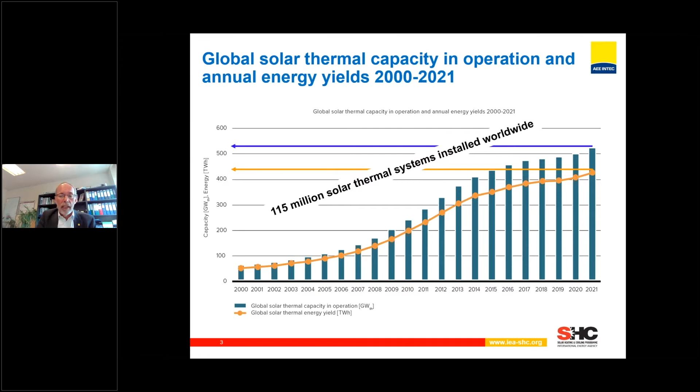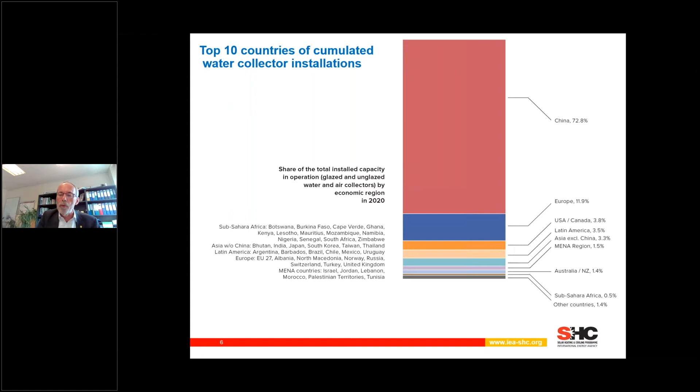Showing you the top 10 countries of the cumulated water collector installations, the total installations we have worldwide at the moment. You can see this did not change a lot or not significantly, whereas the major market is still China. It's really the dominating market worldwide, followed by Europe with about 12% of the total installed capacity. Then you have North America with US and Canada, Latin America, Asia excluding China, so mainly India, and they are in the range of 3 to 4% of global installations, then the MENA region with 1.5%, and Australia and New Zealand with 1.4%. So this just shows you there's really a dominating market by China in absolute terms.

This is also shown here in the top 10 countries of accumulated installations. China is clearly on top, with about 364 gigawatt installed capacity, followed by Turkey, United States, Germany, Brazil, India, Australia, Mexico, Greece, and Italy. What you can see here is what is installed in absolute terms.

The different colors give you an indicator of the different types of collectors installed. The yellow ones are unglazed collectors, mainly used for swimming pools, dominating in the United States and to a certain extent in Australia. The blue parts are evacuated tube collectors, and flat plate collectors are the green ones. So you have different markets in terms of collectors.

If you look at the same markets, the top 10, but per 1,000 inhabitants, this shows you more about market penetration. Barbados is leading with 600 kilowatts installed capacity per 1,000 inhabitants, almost 1 square meter per person, followed by Cyprus, Israel, Austria, Greece, and the Palestinian territories. China is number 7 worldwide in terms of installed capacity per inhabitant. So in terms of market penetration, other countries lead ahead of China. Of course, China, a huge country with a big population, leads in absolute terms.

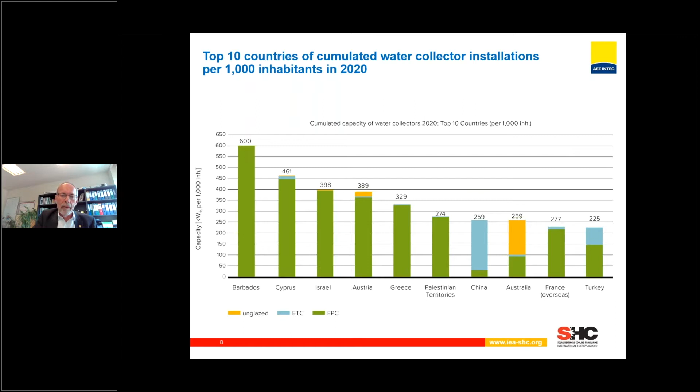What's also interesting, and this is changing gradually, on the worldwide scale the most used collector type is evacuated tube collectors, with 68-69% of the total installed capacity, or newly installed capacity in 2021. Worldwide, close to 25% are flat plate collectors. When I say world, as you saw in my previous slide, it's dominated by the Chinese market. It's really the Chinese market dominated by evacuated tube collectors.

If you look to Europe, it's a completely different, almost opposite picture: about 80% flat plate collectors and about 17% evacuated tube collectors, then air collectors and unglazed water collectors. What's interesting is that over the years we see a trend where, on the European side, flat plate collectors are slowly but constantly losing market share in terms of percentage, while evacuated tubes are growing slowly but steadily. On the other hand, worldwide, or on the Chinese scale, evacuated tube collectors lose a little market share while flat plate collectors are coming up more. This is an interesting trend we've observed for more than 10 years.

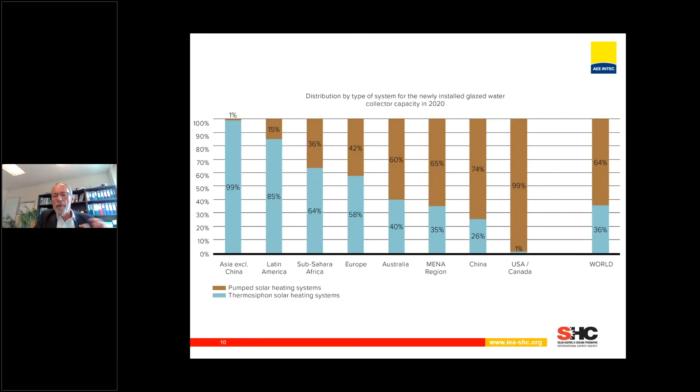Another important thing is that depending where you come from, you have a different picture of solar thermal systems. Worldwide, only 36% of total installed new installations are thermosiphon systems, the rest are pumped systems. But if you go to Asia, excluding China, so mainly India and other countries, basically the whole market is thermosiphon systems. You also have a majority of thermosiphon systems in Latin America with 85%, and 64% in Sub-Saharan Africa. But even in Europe—not just the EU, we also count Turkey, for instance—it's about 58% thermosiphon systems and 42% pumped systems. This just gives you an idea of how different these markets really are.

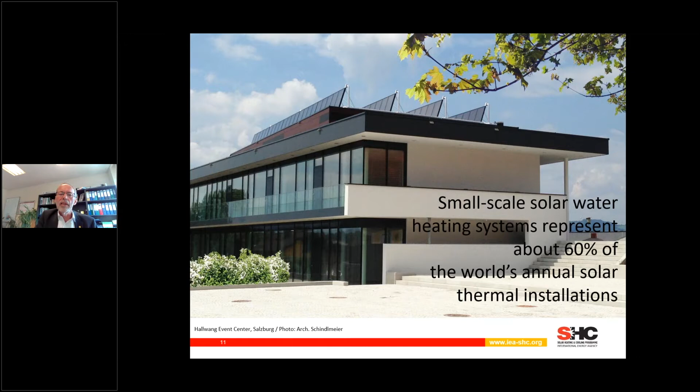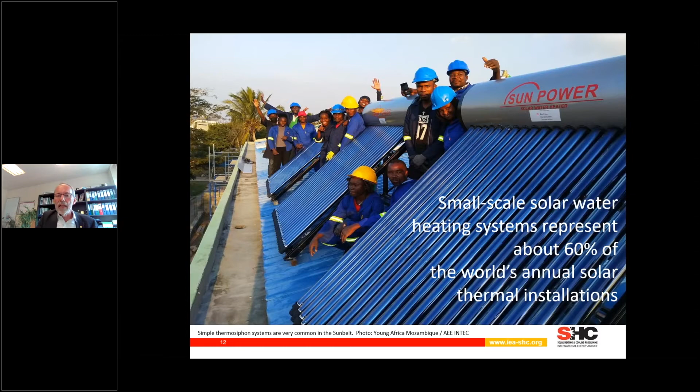Important to note: small-scale solar heating systems still represent about 60% of the world's annual solar thermal installations. This is one example of a solar combi system, used for hot water preparation but also for space heating. Therefore the collector area is installed relatively steep, because it's also used for space heating during winter time. But this is also what we summarize under small-scale systems—it can be systems like this, but a lot of small-scale systems are like this one, a thermosiphon system installed in Mozambique. These dominate, making up about 60% of the world's annual solar thermal installations.

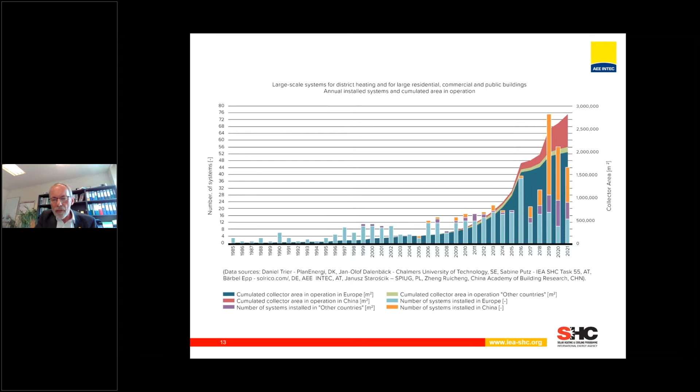By the end of 2021, we had 530 large-scale systems documented. What we mean by large-scale is bigger than 500 square meters or bigger than 350 kilowatts installed. The total capacity of these systems is 1,970 megawatts, corresponding to 2.8 million square meters of collector area. Last year, 44 new large-scale systems were installed, about 142 megawatts.

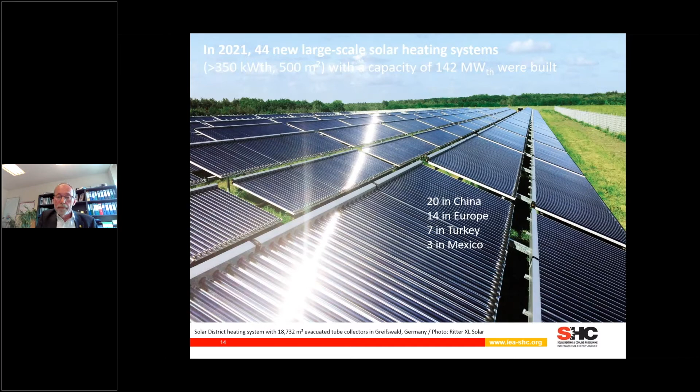Out of this, 20 are in China, 14 in Europe, 7 in Turkey, and 3 in Mexico.

You can look at it in detail if you download the overall report. But in total, we have 299 solar district heating systems in operation with 1.6 gigawatt.

2021 was dominated, at least in Europe, by smaller solar district heating systems. One of them is here - it was installed in Friesach, Austria, with a capacity of 4.1 megawatt. So they're smaller than the big systems we used to show in Denmark, where a single system was significantly bigger, but last year was dominated by smaller scale, large scale systems, if I can put it that way.

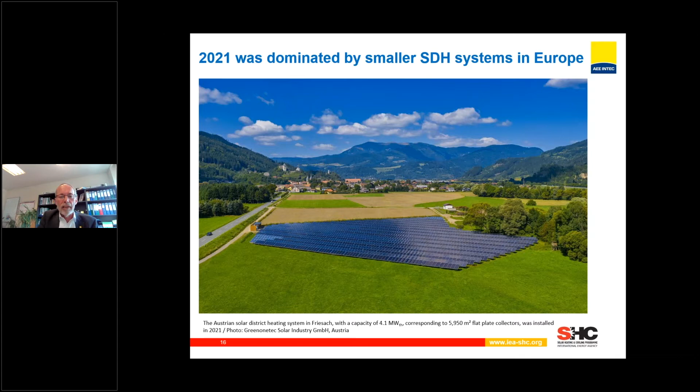Solar heat for industrial processes - I won't go into much detail here because Bärbel Epp will cover this topic more. Just the numbers: industrial process heat at the moment has close to 1,000 systems, 975, with 1.23 million square meters of collector area.

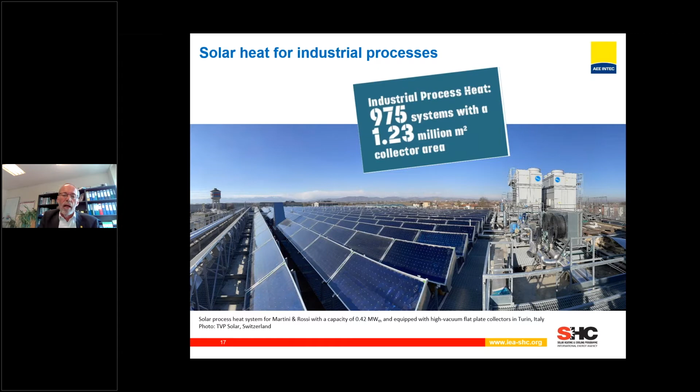What might be interesting on this slide is a flat plate, high vacuum flat plate collector for the company Martini and Rossi in Turin, Italy. This is why I mention it - we can go to higher temperatures with these evacuated flat plate collectors.

I think there's more to come in the upcoming years with the increase of gas prices and energy prices, so there's a lot of interest now from industry to go towards solar.

Finally, the last technology I present is PVT, the combination of photovoltaic and thermal systems. These collectors produce electricity and heat at the same time. This is really also a success story of the last years - in total, 1.4 million square meters of PVT collector area is installed.

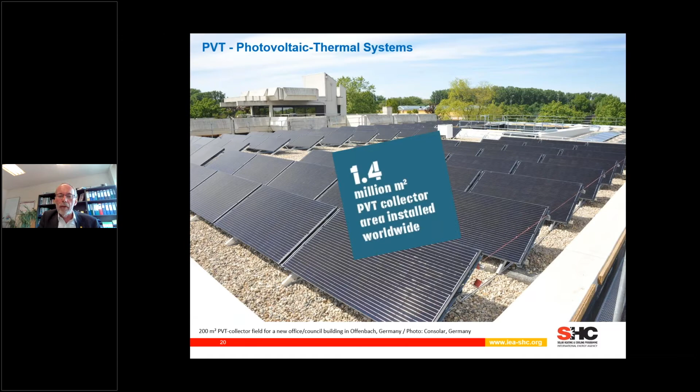This is one of the systems in Switzerland, installed on a Minergie house. It shows that in total we have 6,000 new PVT systems commissioned in 2021 - quite a number of systems.

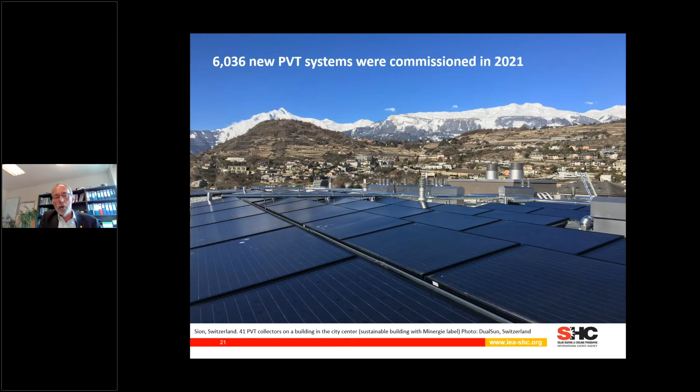The accumulated number of PVT systems in operation is about 34,000 systems already installed, representing, as I mentioned, 1.4 million square meters. We have to distinguish between heat and power: 750 megawatt thermal and 254 megawatt electricity, which shows the relation between the power and heat output of the systems.

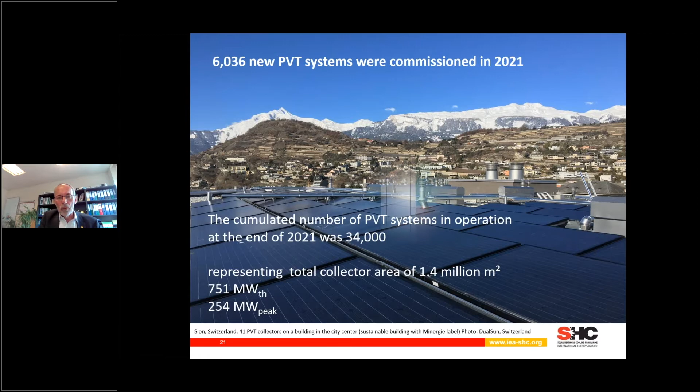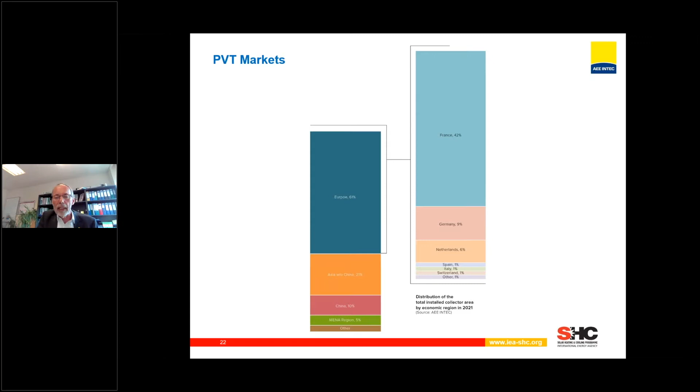Where is the main market for PVT? Mainly in Europe with 61%, followed by 21% in Asia without China, and about 10% of the PVT systems up to now installed in China. If you go to Europe, it's dominated by France with 42%, followed by 9% in Germany, 6% in Netherlands, and then 1% each in Spain, Italy, Switzerland, and other European countries.

So I hope I could give you an overview on the main content of Solar Heat Worldwide of this year's edition. If you're interested in more details, in all the tables, in all detailed information, you can download it from the IEA Solar Heating and Cooling website. Go to publications and just download the overall report with all details. And with this, I thank you for your attention.

See? Yes. Okay. Hello, everybody. I'm very glad to introduce China's solar thermal developing in this webinar. And the contents have 4 parts. The first is background.

China has a very rich solar resource in the world. Even in the worst area, the solar irradiation is the same as most of countries in Europe. So China has a better condition for solar application.

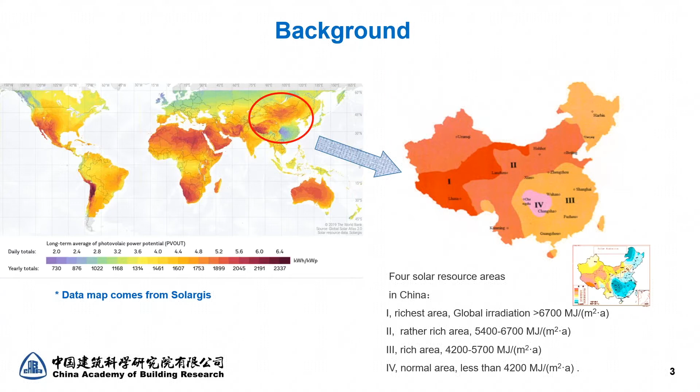China's solar application started at the end of 1970s. One important event is the foundation of China Solar Energy Society in 1979. And since then, through more than 20 years of efforts, China has been the largest market of total capacity in operation since 2005, and the ratio accounts for 72.3% of the world in 2021.

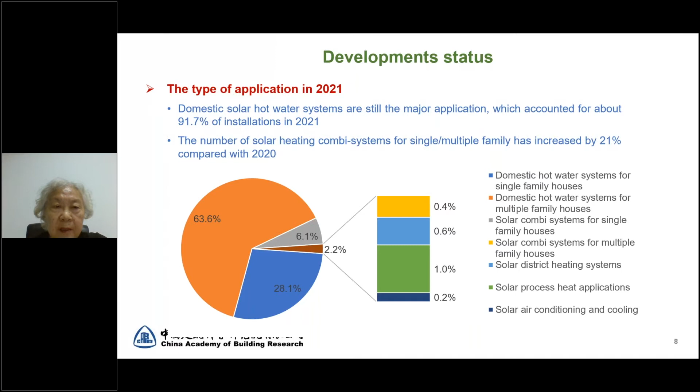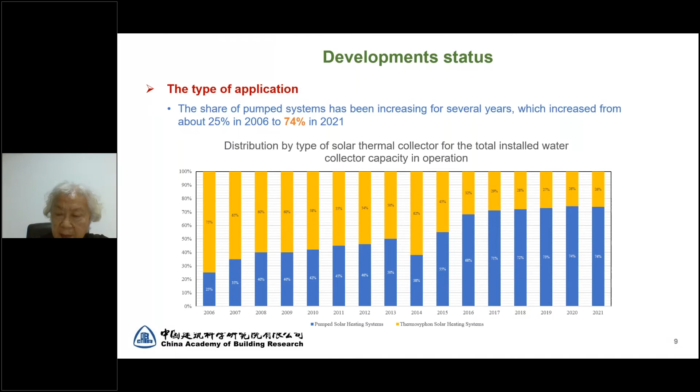From the type of application in China, we can see domestic solar hot water is still the major application type. But in these years, the solar heating combi systems increased faster. The share of pumped systems has increased for several years - in 2006 it was only 25%, but in 2021 it changed to 74%. At the same time, the share of flat plate collectors increased. In 2009, it was only about 5%, but in 2021 it changed to about 26%.

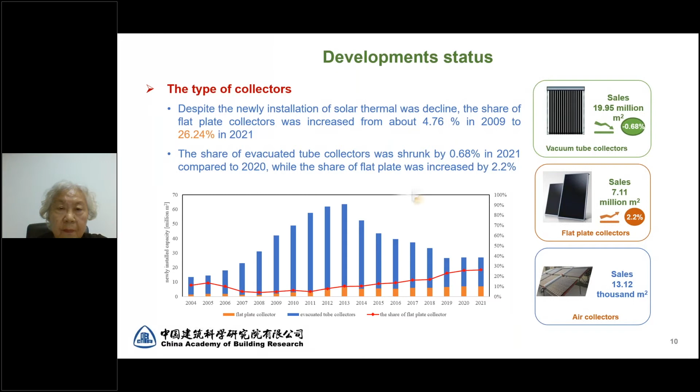As the clean heating pilot work has been in place since 2017 in northern China, it promotes faster developing for solar space heating. This project is a solar space heating system, a solar assisted water and air source heat pump system. The location of this project is Guyuan County, Ningxia Province. It was finished by Micoe Technology Group Company Limited, and the completion time was 2020. Total heating area is 21,934 square meters, using flat plate collectors. The system's solar fraction is 68%.

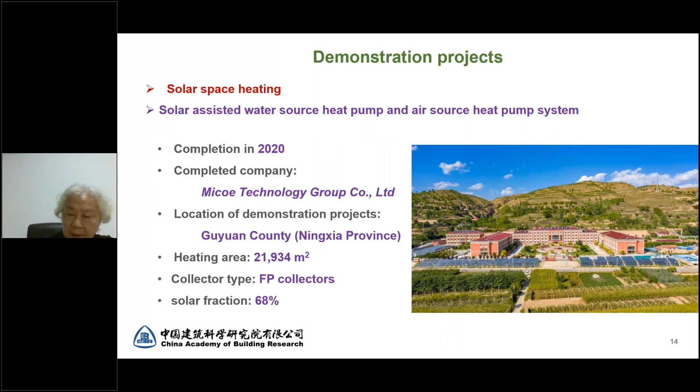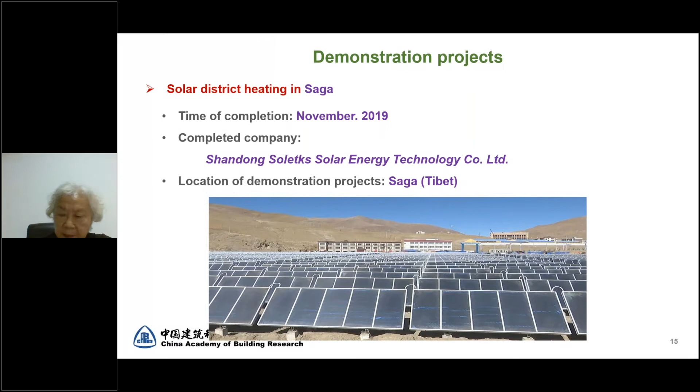Next is a solar district heating system in Saga County of Tibet. The completion time is November 2019. The completing company is Shandong Soletks Solar Energy Technology Company Limited. This system has a heating area of 81,000 square meters, using large size flat plate collectors with an area of 18,000 square meters. The volume of the central water storage tank is 4,500 cubic meters.

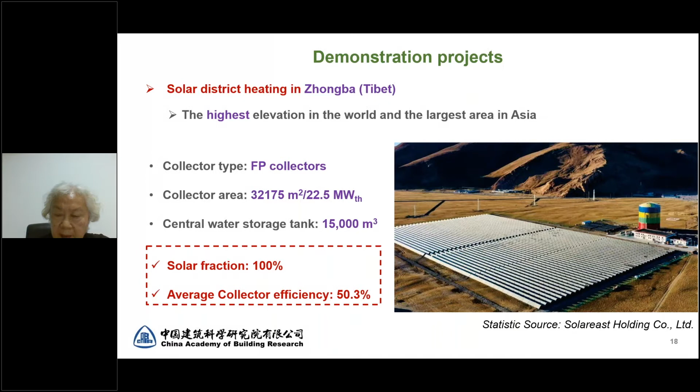From this project, we get some experience and realize what's enough and not enough, so we can make the following plan. The first direction is we should develop a new type of solar collector, especially flat plate collector, with higher working temperature and higher efficiency, and we should put some performance regulations in our national standards.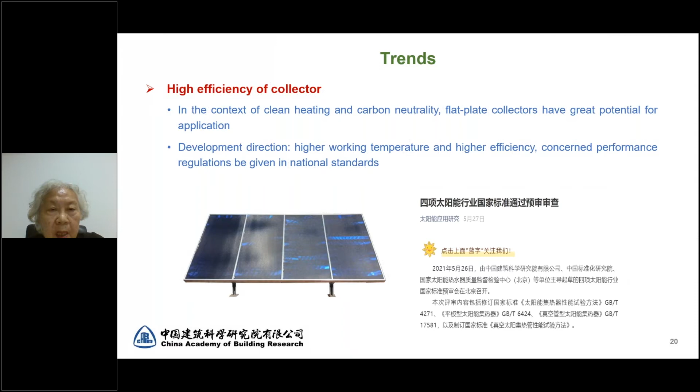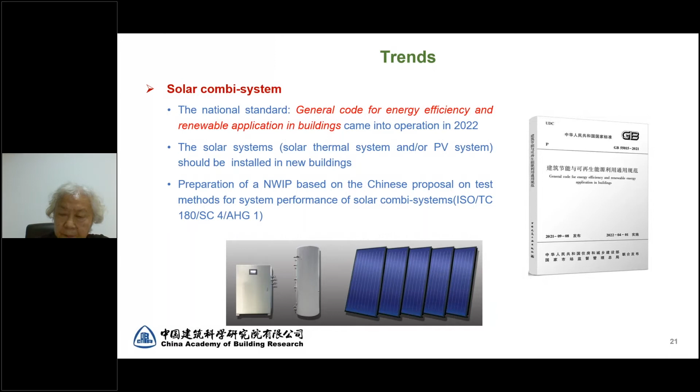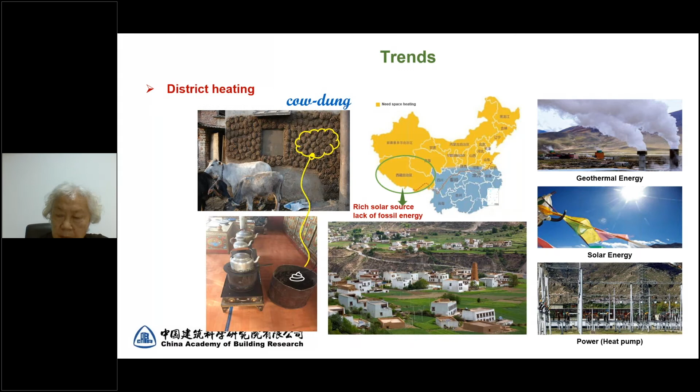In the west part of China, having rich solar source, we should extend solar district heating projects in this area. This is another direction. At the same time, we should also promote developing of solar heating combi systems and PVT systems in single or multiple family houses.

And the last direction is to develop solar thermal processes such as solar drying and seawater desalination.

From the above analysis, we can get the next conclusions. First, solar thermal is still the key solution for domestic hot water and space heating without excessive fossil energy consumption. Second, high performance solar collector, solar combi system, and PVT technologies should be developed in the future.

Although with the progress of carbon neutrality, the newly installed capacity of solar thermal in 2021 slightly increased, we have many difficulties that should be overcome. What's the difficulty compared with photovoltaic or heat pump systems? The solar thermal system is more complex and costs higher. This is a main barrier for promotion of solar thermal technology. This is not only for China, but also for other countries in the world.

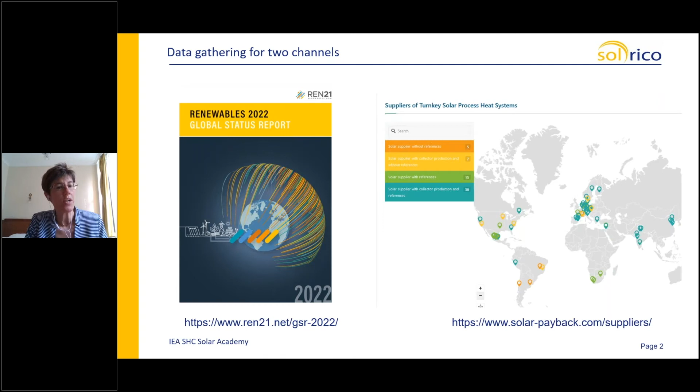I think the drivers there were really the rebound of the economy. The construction sector was really strong again in 2021. Then there were some marketing activities started by a company, like a trade-in: they offered residential clients to bring back their boilers or solar water heaters and get a recharge for the new system. This increased sales at the small scale. And this green heating policy also drove markets, which Professor Zheng also mentioned.

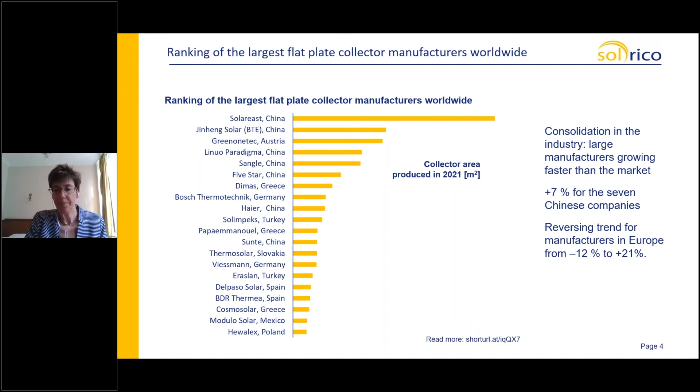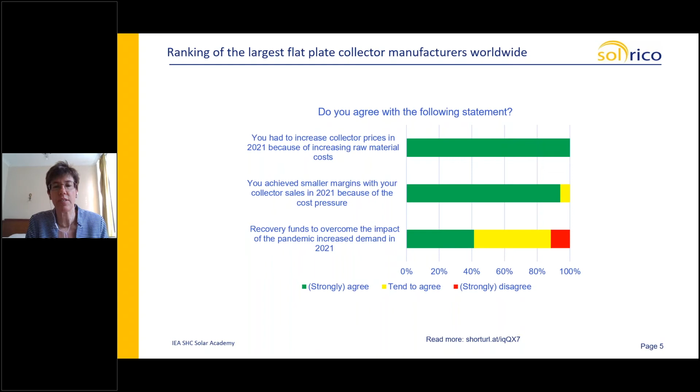Now we turn to the SHIP market, as shown on this world map, which you can find at solar-payback.com/suppliers. This shows the variety of companies listed on the world map. It's been updated very recently — we sent a questionnaire to all the companies asking about their business idea. Some were dropped from the list, and so on. I've added little arrows next to the collector manufacturing they are doing.

We have about 21 companies that are technology neutral — they only plan systems and don't have their own production. But the majority of these companies still produce a collector module. That shows we're fairly early in developing SHIP, because usually you'd expect more planners who just purchase turnkey systems from industry. In the meantime, though, collector manufacturers are developing the projects themselves.

You can see from the arrows that there's a clear shift from stationary collectors like vacuum tube and flat plate towards concentrating ones. It seems more and more concentrating collector manufacturers find it interesting to provide solar industrial heat at higher temperatures, and they are gaining market share.

Overall, we now have 15 parabolic trough manufacturers listed on the world map, 6 linear Fresnel ones, and 5 concentrating dishes. This reflects that this technology is also spreading outside India now — not all of them are identical parabolics, they have different models which we've gathered there, so there's a spread of this technology to Canada and other countries as well.

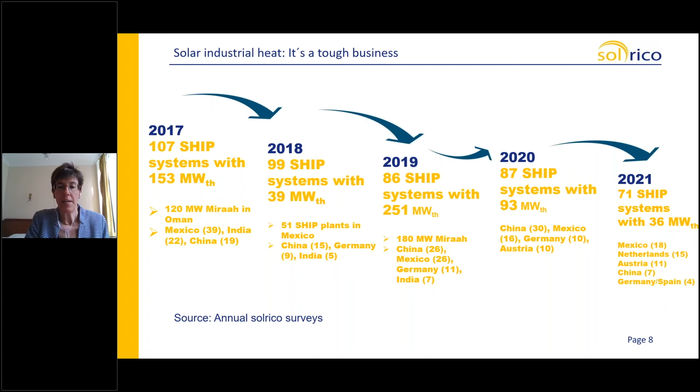To stay on this, 2021 was really a very weak market. I want to give you these very striking figures again: among the manufacturers that we questioned, only 7 out of 48 that answered this question were satisfied with their business development.

So the reasons why business development is difficult in solar industrial heat are listed here, from the statements of the manufacturers. The development times are too long. You have less room, for example in India, where everything's attention is allocated to PV. In Austria, long lead times and decision-making processes take very long. The government in Mexico has stopped supporting it a bit, and as the Israeli company says, there's low awareness and headwinds from heat pumps.

So several reasons, and this has resulted in, among the around 80 solar industrial heat manufacturers we contacted this year, only 16 have commissioned a single project. That's 20%. So that means overall, some companies only realize a project every second year or so.

Now I want to show you that the variety of projects is getting wider. These are some projects realized in 2021, and we can see some interesting trends there. Also the pipeline is very nicely filled, better than probably ever before. I will show this in the next slides. What we have seen here is not by scale, not by size, but more by the special or innovativeness of the projects.

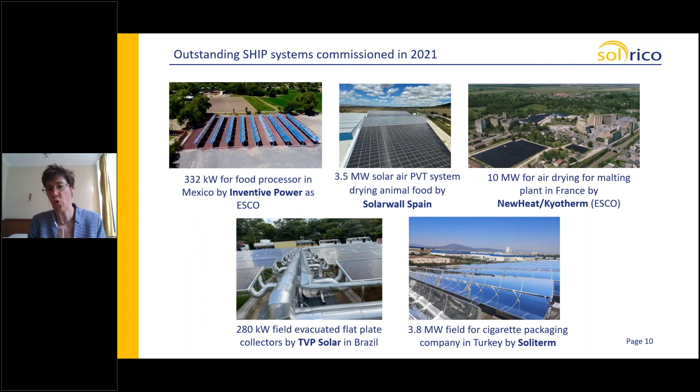We also have a unique plant, I think, by Soliterm in Turkey. It's a cigarette packaging company in Izmir, which has done already a second field. The first one was 4.2 megawatt, and now they added another 3.8 megawatt, and they inaugurated this huge plant last week. This will hopefully hit the news in Turkey, which has very nice irradiation, to have follow-up projects in this solar industrial heat domain.

Now what is in the pipeline? We asked the companies, because the numbers in 2021 were low, what do you have under construction? And we found that there is a big amount of especially concentrating systems under construction by year's end.

Some of them, even this California one from Sunvapor pictured there, is already commissioned in February. So this is the status quo from the beginning of the year, and all these systems will be commissioned over the year. This has to do with nice subsidies in California. There are big parabolic trough programs coming up, plans planned for September.

We had this huge funding by IDAE in Spain for thermal energy production - that's how the funding project was called. It allocated money to the regions, and we have a lot more to come. We also had the Hycool project, a new project which resulted in 2 Fresnel systems installed by Ecotherm in Spain. This totals to 40,000 square meters of concentrating collector area, while the whole market in 2021 in concentrating heat was only 12,000 square meters.

So you see that what is mentioned here now is already 4 times more coming online this year. It seems there was a real delay because of the pandemic, some projects delayed. Now we really bear the fruits of these long-term subsidy schemes, and we will see some very nice presentations.